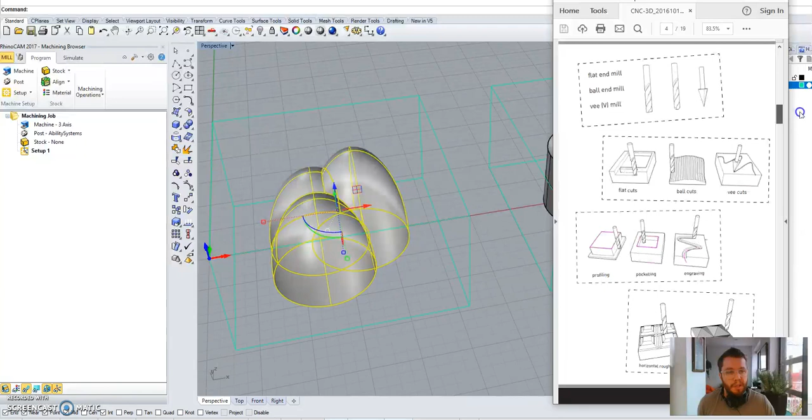When you're working with a three-dimensional object, it's clearly a little bit more important to get bearings right in the z-axis, because you're going to be working with a thicker object, thicker material, and more potential for collisions.

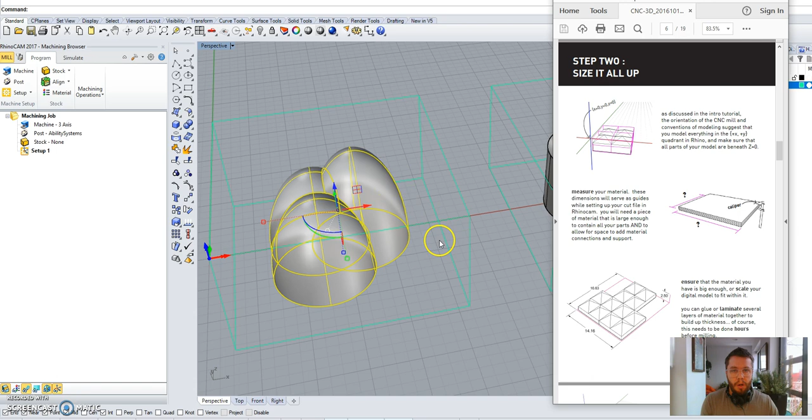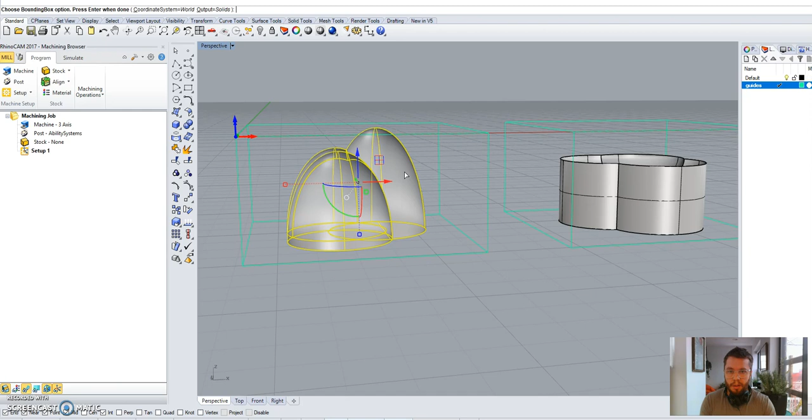What I like to do is set up some guides that you'll work with throughout the entire process. You can do this manually or without any guides if you just eyeball it in the different viewports in Rhino, but for clumsy people like me, I like making a bounding box around an object that I want to mill, extracting a wireframe of that object, and then grouping the wireframe. This gives you an easy XYZ extents of your object to work with later.

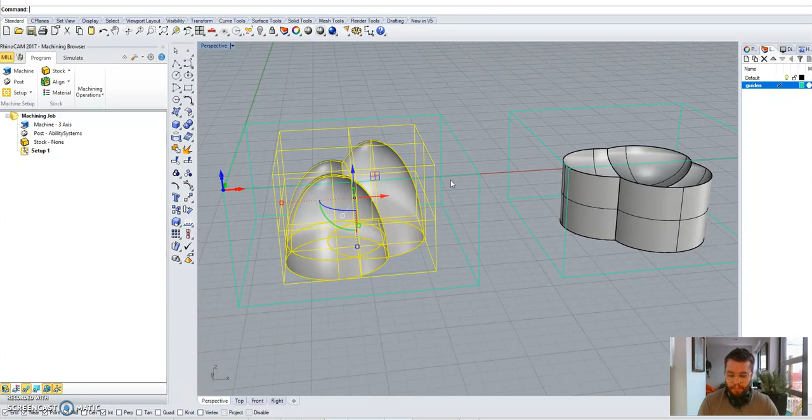You can see in this working file I already have it positioned somewhere good, but let's assume that I haven't done that already.

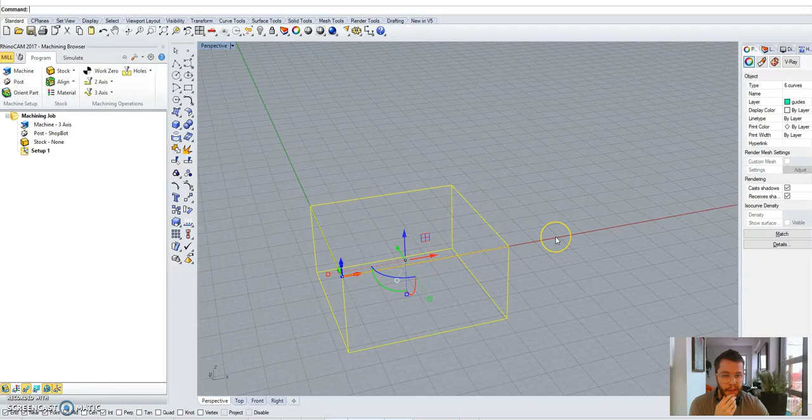Here in my separate working RhinoCAM file, apart from my modeling file, I've already sketched a box of the material I want to work with. I know beforehand that I want to work with a 6 by 6 by 3 inch block of foam that will be available for you in the shop. I might not know, however, after modeling my object, how big a block of material I need to cut it. So how do we figure that out?

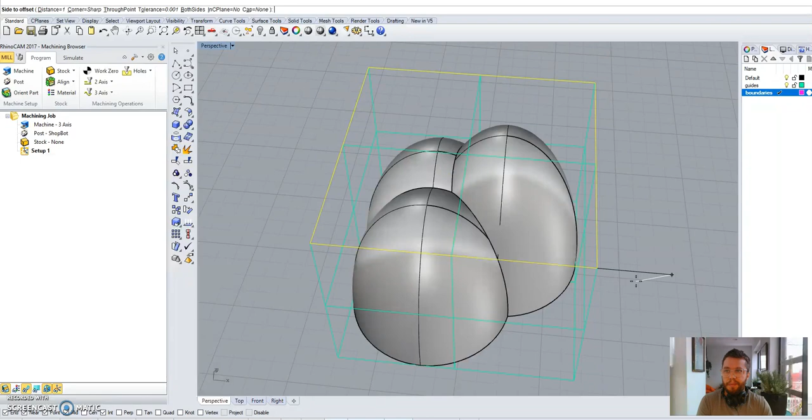The same principles apply from the 2-axis tutorial: in the XY extents of your model, you should have about an inch of space around it to work with, to secure things down, to screw it into the table. So if I give this an offset of an inch, you can see I've already conveniently modeled my object to fit within this material box I've drawn, with an inch of play around the outside of it.

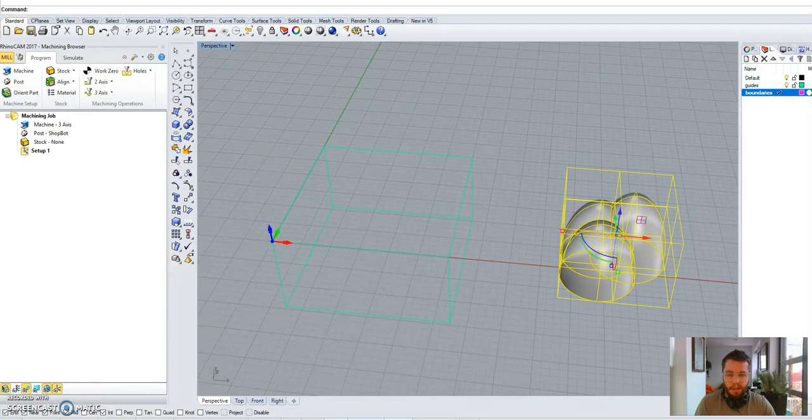As for actually positioning it, start by backing it into this corner of 0, 0, 0, and below the XY plane, below z equals 0.

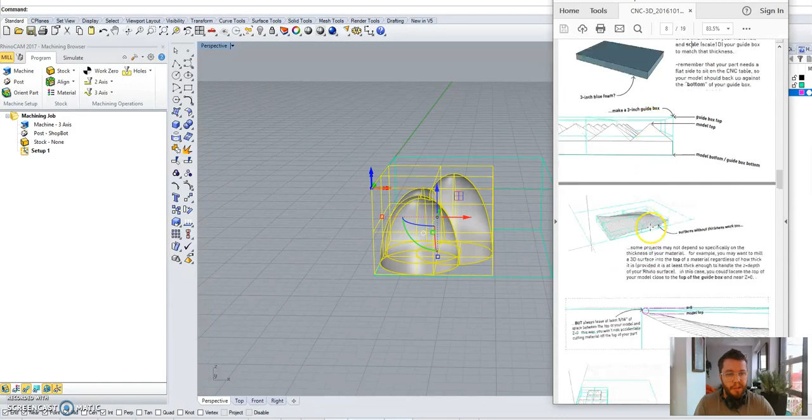Now if you look in the tutorial, it tells you about building a bounding box around your object. It has a little detail about making sure there's a bit of daylight in Z between that origin plane and the top of your object. This is because zeroing the bit to the surface of your material is slightly imprecise. You want a little bit of daylight there, a little material to cut through before you get to your part, so you don't accidentally leave some of your part out of your material, especially if your material has an uneven surface, which a lot do.

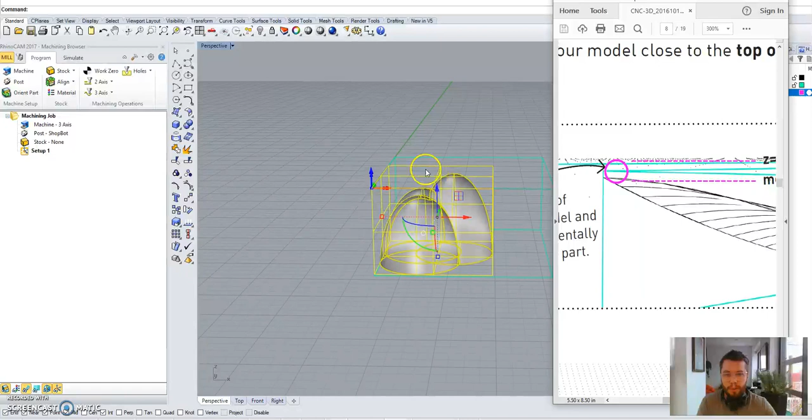So looking in one of the side or front views, what I do is make sure I've moved my CNCing object slightly below z equals 0. You can see here I've conveniently made an object that's just slightly less than 3 inches, so it fits perfectly in our box. But that's not necessarily the case.

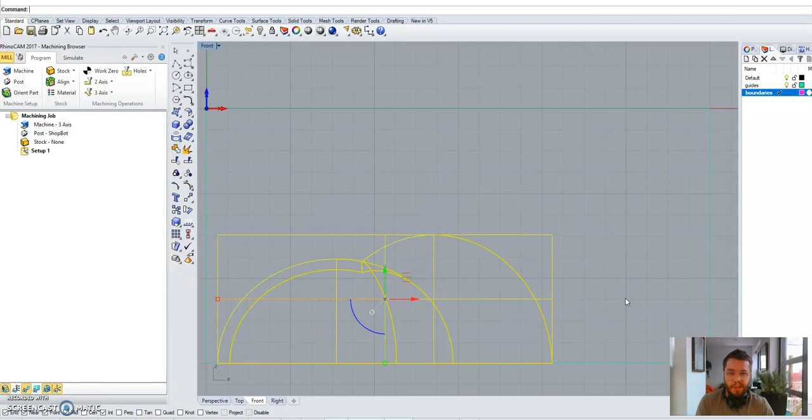You might have an object that's only this big, and that's the material you have to start with. If you're concerned with maintaining the thickness of that object as modeled, remember it has to be pushed to the bottom of your stock to cut it correctly. Try to be economical with this - there's really no good reason to blow through 2 inches of material to get to a 1-inch object you're cutting. But we're going to use the full-size object.

And then finally make sure that it's positioned in XY with that good 1-inch perimeter around it before you get to the edge of your material.